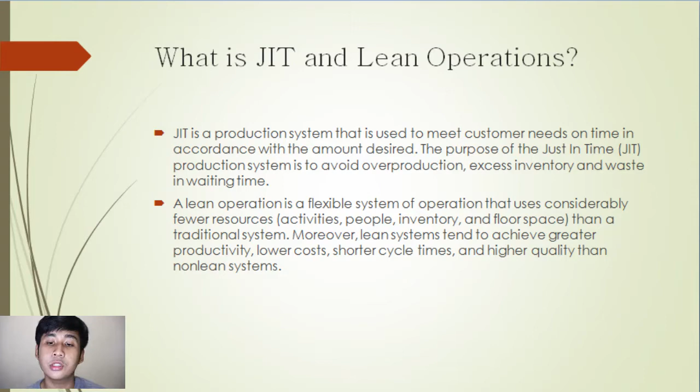Moreover, Lean systems aim to achieve greater productivity, lower costs, shorter cycle times, and higher quality than non-Lean systems. The main point is Lean operation is a flexible system that uses minimal resources and produces high quality goods or services.

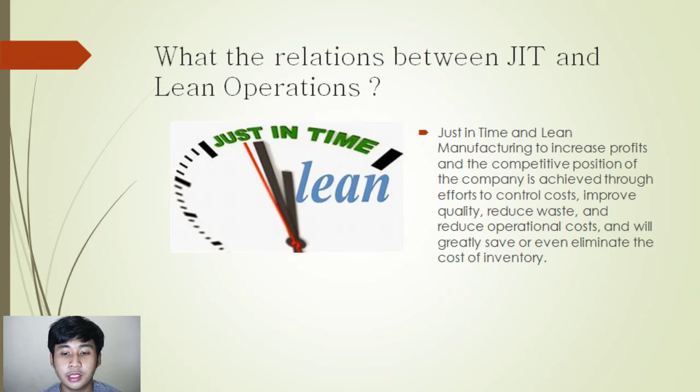What is the relation between JIT and Lean operation? Just-in-time and Lean manufacturing aim to increase profits, and the competitive position of the company is achieved through efforts to control costs, improve quality, reduce waste, and reduce operational costs, and will greatly save or even eliminate the cost of inventory. Then why is Lean operation important?

The first is Lean brings issues to the surface. There are multiple occasions where manufacturers refuse or simply do not know how to identify issues faced in their operations. This frustrating situation has accounted for many preventable losses. Perhaps one of the greatest tools from Lean manufacturing is value stream mapping or VSM.

In VSM, manufacturers will assess the process and obtain data from the production line. By seeing with their own eyes, the manufacturer can collect data and identify any waste that is often hidden. It is often the smallest issues that collectively impact one business. Such waste can come in a huge variety and has different impacts on operation costs. A manufacturer could easily run Pareto analysis to identify the biggest waste factor and focus on the issue.

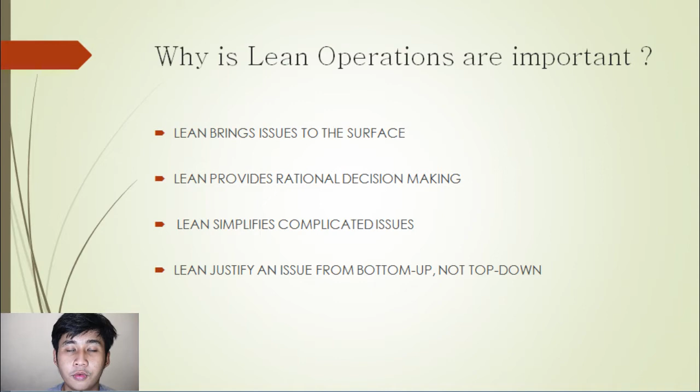This implies a sense of belonging and responsibility on the shop floor as operators are involved in improvement activities. It's very important to obtain this as it allows for long-term continuous improvement. Then, here is how JIT and lean operations are different.

So, to make it simple and memorable, lean manufacturing is a customer-centric philosophy, and JIT manufacturing is a business-centric philosophy. Okay? Let's take a look at what each process actually accomplishes. Companies that implement lean manufacturing are aiming to do the following: eliminate wasteful material and processes, streamline production, and provide customers with the most value for their dollar.

In lean, waste typically refers to inventory. So, rather than keeping the best-selling product in stock, manufacturers produce products as they are ordered. This simple step reduces production time and cost, which results in more satisfied customers. Ultimately, the end goal in lean manufacturing is to improve production for the sake of keeping the customer happy and coming back for more.

In JIT manufacturing, JIT is a philosophy of continuous improvement that strives to achieve world-class manufacturing. A strong JIT manufacturing operation should be able to accomplish three important things. The first is eliminate waste, second is remove variability, and the third is improve throughput.

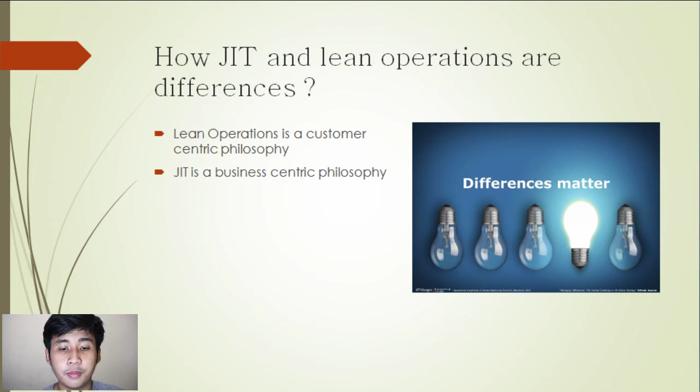Altogether, what you have with JIT is a management philosophy that encourages fast problem solving and a do-it-right-the-first-time attitude in order to achieve the best possible result.

Characteristics of lean systems. 1. Waste reduction is a hallmark of lean systems. 2. Continuous improvement is another hallmark, a never-ending effort to improve. 3. Use of teams: cross-functional teams, especially for process improvement. 4. Work cells, along with cellular layouts, allow for better communication and use of people. 5. Visual control: simple signals that enable efficient flow and quick assessment of operations.

6. High quality in process and in output. 7. Minimal inventory: excess inventory is viewed as waste. 8. Output only to match demand: throughout the entire system, revert to a demand pull. 9. Quick changeovers enable equipment flexibility and output variety without disruption. 10. Small lot sizes enable variety for batch production. And the last is lean culture: the entire organization embraces lean concepts and strives to achieve them.

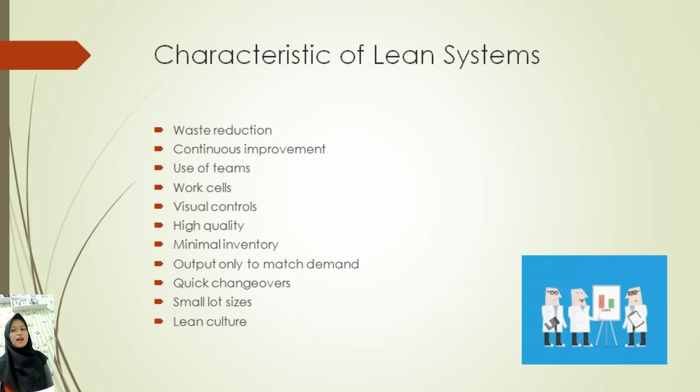Risks of lean systems. First, increased stress on workers due to increased responsibilities for equipment changeover, problem solving, and process and quality improvement. Second, fewer resources, such as inventory, people, and time, available if problems occur. And third, supply chain disruption can halt operations due to minimal inventory or time buffers.

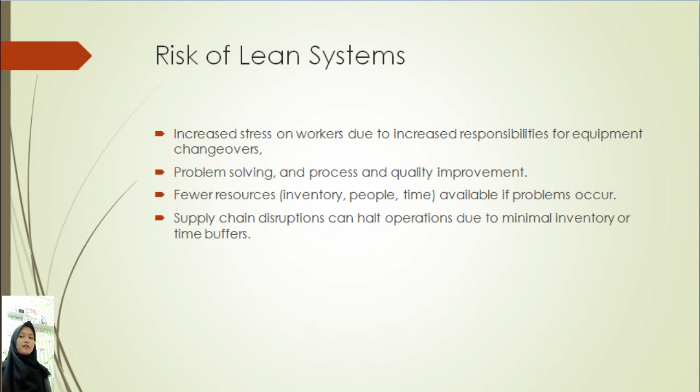An overview of the goals and building blocks of the lean production system. The ultimate goal of a lean operation is to achieve a system that matches supply to customer demand. Supply is synchronized to meet customer demand in a smooth and uninterrupted flow. And the picture provides an overview of the goals and building blocks of the lean production system.

The ultimate goal of lean is a balanced system, that is one that achieves a smooth, rapid flow of materials and work through the system. The idea is to make the process time as short as possible by using resources in the best possible way. The degree to which this is achieved depends on how well certain supporting goals are achieved. Those goals are to eliminate disruption, to make the system flexible, and to eliminate waste, especially excess inventory.

Disruptions have a negative influence on the system by upsetting the smooth flow through the system, and they should be eliminated. Disruptions are caused by factors such as poor quality, equipment breakdown, changes to the schedule, and late deliveries. Quality problems are particularly disruptive because in a lean system there is no inventory that can be used to replace defective items.

All disruption should be eliminated where possible. This will reduce the uncertainty that the system must deal with. A flexible system is one that is robust enough to handle a mix of products, often on a daily basis, and to handle change in the level of output while still maintaining balance and throughput speed. This enables the system to deal with some uncertainty.

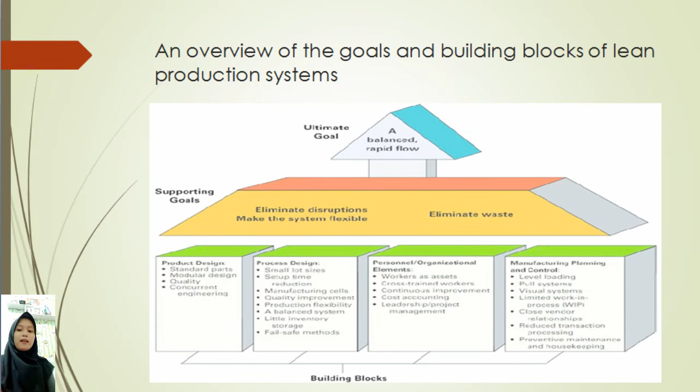Product design. There are 4 elements of product design. First, standard parts. The use of standard parts means that workers have fewer parts to deal with, and training times and costs are reduced. Second, modular design. Modules are clusters of parts treated as a single unit. This greatly reduces the number of parts to deal with.

Third, highly capable production system with quality built in. Quality must be embedded in goods and process. And fourth, concurrent engineering. Concurrent engineering practice can reduce disruption.

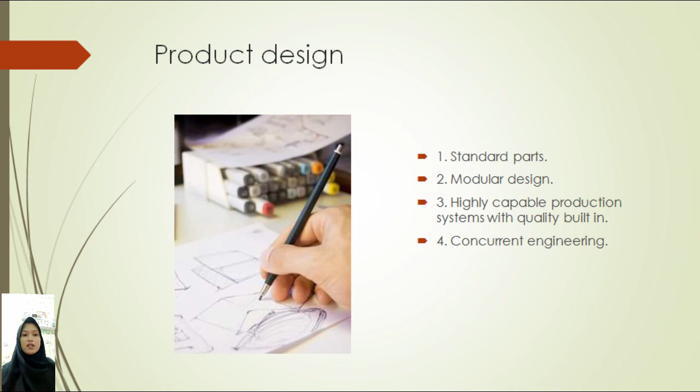Process design. Process design has 8 elements, such as, first, small lot size. In the JIT philosophy, the ideal size is 1 unit. Small loads moving through the system reduce the in-process inventory. It reduces the carrying cost and space requirements. Small loads permit greater flexibility in scheduling.

And then setup time reduction. Small loads and changing product mix require quick setup. Long setup times require holding more inventory than with short setup times. Shigeo Shingo made a significant contribution to lean operation with SMED, or single minute exchange of die. This system is for reducing changeover time.

And then manufacturing cells: multiple manufacturing cells, highly specialized and efficient production centers. It reduces changeover times, with high utilization of equipment. Next, quality improvement: finding and eliminating the causes of problems to improve the quality. Use of automation can reduce the defects and improve the quality. Next, production flexibility: reduce the bottlenecks to improve the production flexibility.

And then a balanced system, distributing the workload evenly among workstations. It helps to achieve a rapid flow of work through the system. Time needed for each workstation must be equal to or less than the takt time, the cycle time needed to match customer demand for the final product.

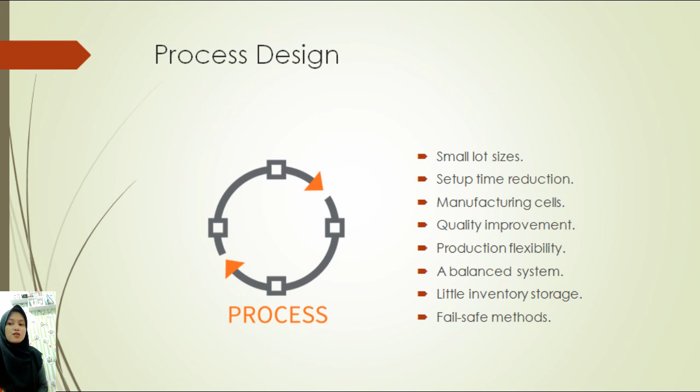Assalamualaikum warahmatullahi wabarakatuh. My name is Abdullah, and here I will explain about manufacturing planning and control.

In manufacturing planning and control, there are 7 elements. First, level loading. Second, pull system. Third, visual system. Fourth, limited work in process, or WIP. Fifth, close vendor relationship. Sixth, reduced transaction processing. And seventh, preventive maintenance and housekeeping.

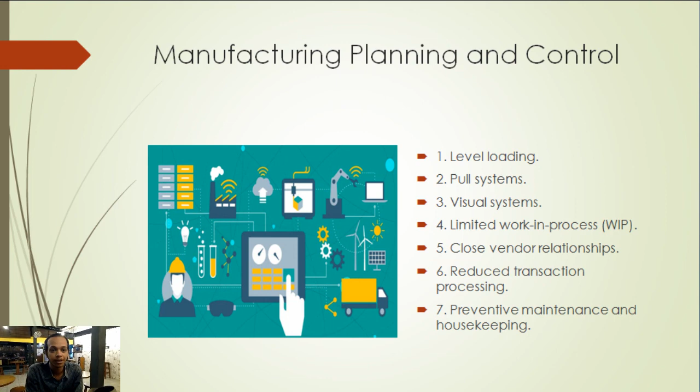There are 5 points for lean tools. First, value stream mapping. Second, process improvement using 5W2H. Third, Lean and Six Sigma. Fourth, JIT deliveries and the supply chain. Fifth, Lean and ERP.

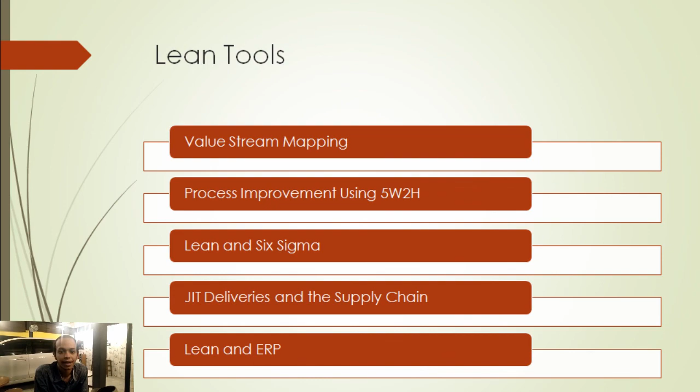There are 3 stages to transitioning to a Lean system. The first stage is planning a successful conversion. Second stage, obstacles to conversion. And the third stage is a cooperative spirit.

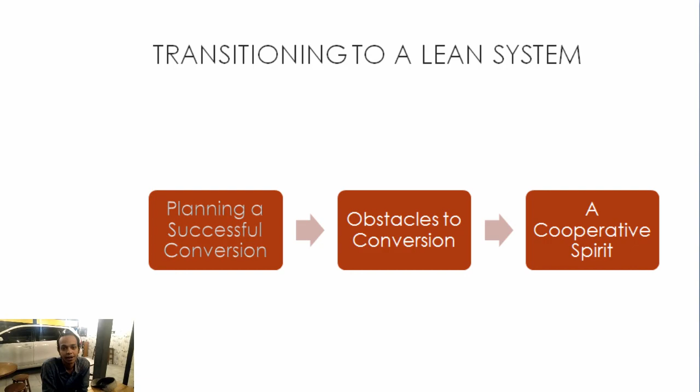With lean, benefits can be achieved in services. First, eliminate disruption. Second, make the system flexible. Third, reduce setup times and processing times. Fourth, eliminate waste. Fifth, minimize work in process. And the last, simplify the process.

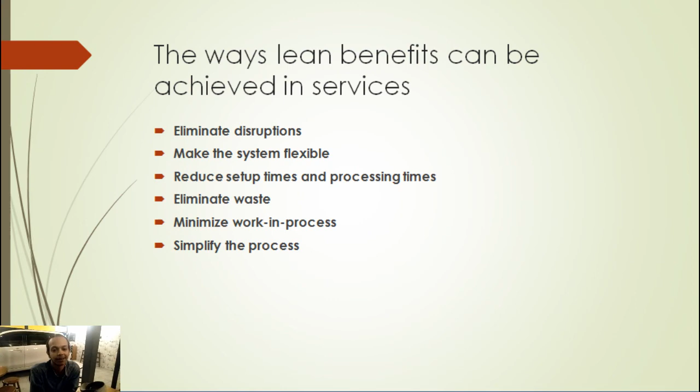Those are my explanations of JIT and lean production. Thank you.